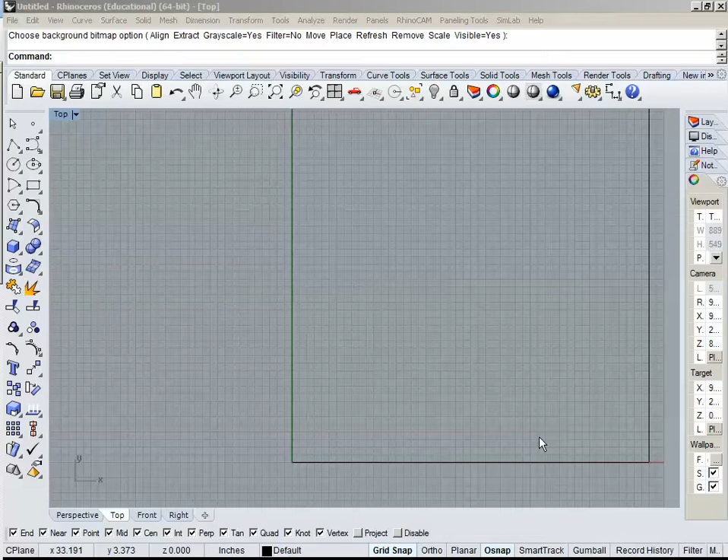Okay, so you're going to have some kind of, let's do a 6 by 6 square. And you guys are going to be offsetting this by 1 inch. So your stamps are going to be 4 by 4.

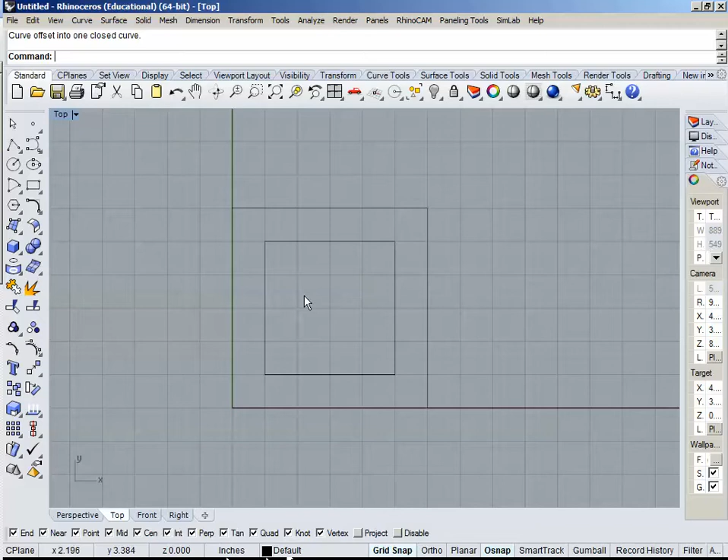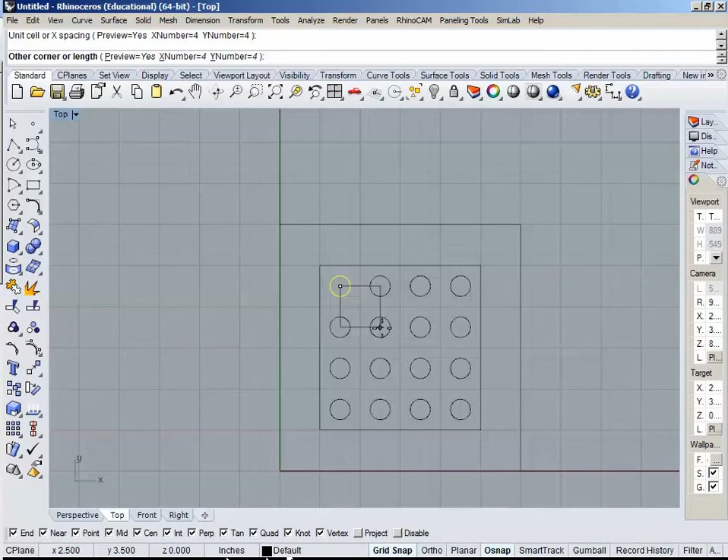So let's just say my pattern, I simply want it to be a bunch of circles. Whoa. And let's just do 4. Doing a 4 by 4 by 1. This is one of the nice features of Rhino 5, that it previews the array. It's awesome. Let's say that's my stamp. All right.

So setting up the toolpath for engraving, if you guys don't already have your RhinoCam browsers open, you should have this tool menu, the drop-down menu for RhinoCam. Machining Operations Browser is the one thing we need to open. And then the second thing is Machining Objects Browser.

And it may not open with all the tools in, because I've used this already. So all the tools that we have in the shop are populated in the knowledge base. If you've already loaded the knowledge base, all that information is already in the browser. So you guys all saw this when we were looking through the drawings.

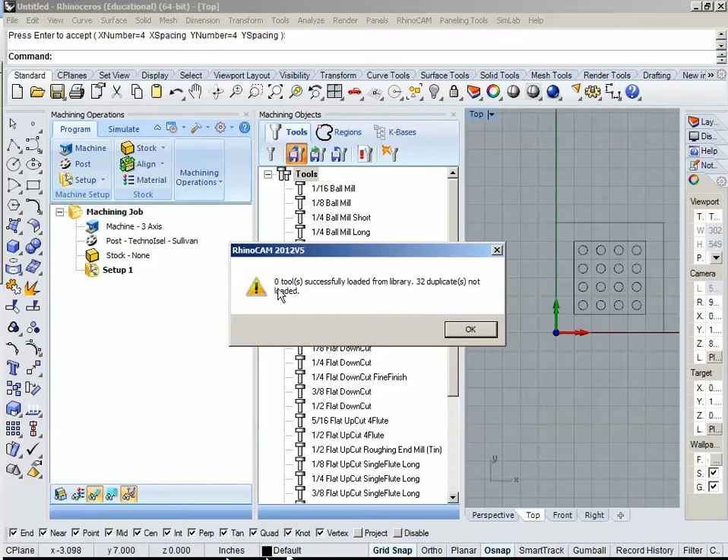What you want to do first is to go into the Tools tab, and it's going to look a little bit different. You click on Load Tool Library. And I got to figure out where mine is. And we need to get you the knowledge base too, so remind me to show you where that is. And you should have an All Tools database. Just open that up. We didn't bring any in because all 32 were already in my system. But it'll say all 32 were brought in.

Then you want to go to knowledge base. We're working in foam. So I'm hovering over these, and you can save the knowledge base or load the knowledge base. You want to load the knowledge base. And looking for foam, much like we did already before. And this looks identical to what we used in drawing, yeah?

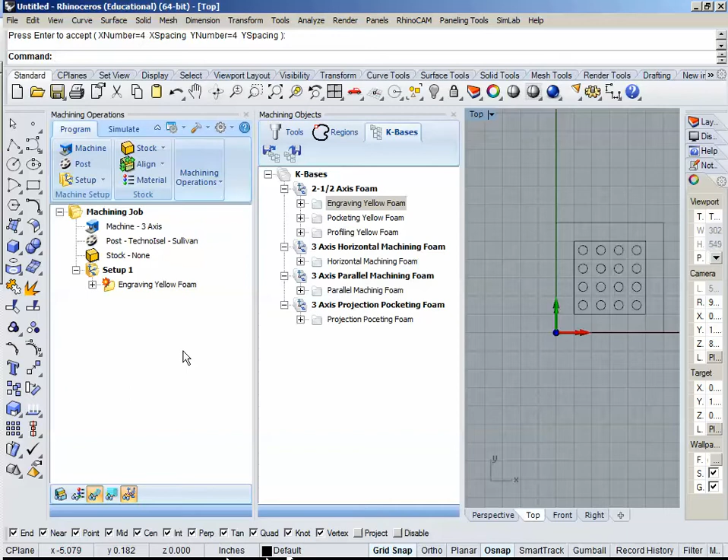And so we're engraving yellow foam. We have yellow foam, but the foam is pink now. So it's pink foam. It's just the foam that is used in construction. It's extruded polystyrene is what it is. So once we're here, we don't need the Machining Objects browser. We can close it out.

You can double-click this folder. If you double-click where the words are, it's going to give you the option of changing. Whoa, it didn't in that case. It usually gives you the option of changing that text. So just get in the habit of double-clicking on the icons. I could double-click on that folder, and it gives me all these tabs.

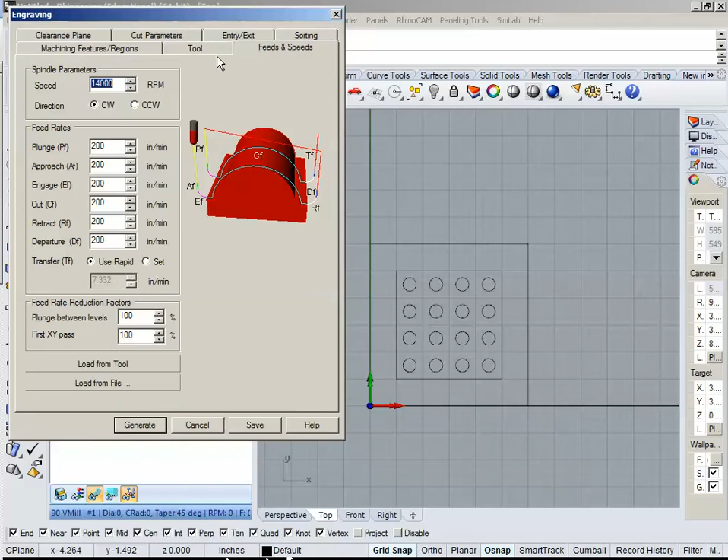I find that if I'm going across these tabs and I go up to this second level, it flips those levels. I find it hard to follow just the graphic layout there. This is the same information laid out in a vertical fashion. So we can work from top to bottom.

Logically, it makes sense to me that we start by defining what we're going to be milling and work all the way down to setting how deep we're going to cut into the surface. That just logically makes sense to me, but there's more than one way to go about that. You'll probably see that depending who you work with in the shops. So I'm going to do it this way. Just clicking the plus here, opening that folder.

First thing is machining features, and as I told most of you at the CNC, these are just the features that we want the CNC to look at, to be concerned with, that it's going to quote-unquote machine, whether it be drawing or cutting or milling. That's all it means. Double-click there.

And then we don't use this flat area drive region. I don't think we've ever used it very successfully in the shop, so we tend to never suggest it for anybody. So you'll only be selecting this top button, select drive/containment region.

And a containment region could be, as we'll see in 3-axis milling, just like a circle, and you say machine only do 3-axis milling in that circle. So it won't see anything beyond it. It's like blinkers on a horse. It also means the line that you want it to engrave on. So it's containing its view just to what you're selecting.

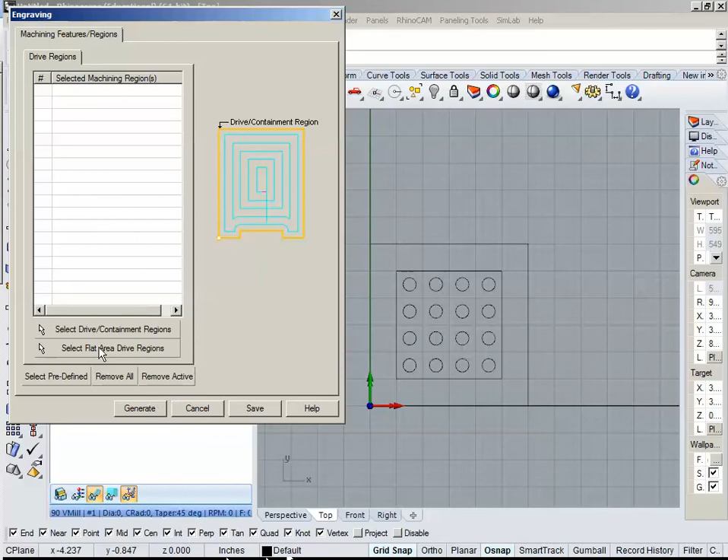No, it looks a little different there. Double clicking. No, it looks a little different. Okay, so I'm going to select the objects that I want to mill out, and I'm hitting enter, or I think you can also right click on the mouse.

And then what we did was we selected 16 regions, which is true. It's a 4 times 4, so it looks like that's good. And I want to save that information. And then now we do need to change the bit.

In the knowledge base, we have the standard settings already pre-populated. We're going to use a 1/8 inch ball mill today in pink foam. So I'm going to open this up, and I'm going to look for a 1/8 inch ball mill, and it'll be here somewhere. 1/8 inch ball mill right there, and I click save.

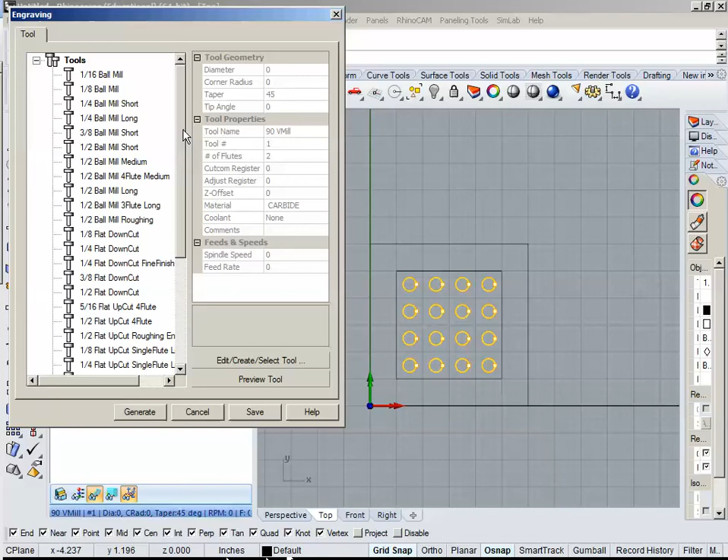So we've told it what to mill it with, and then we could change the feeds and speeds and the clearance geometry, but we're going to leave them the same. So the feeds and speeds is just going to cut as fast as it can. It does that for all. The foam is not going to be more dense, or nothing's going to impede the cutting in any strange way here. Oh, where's this going?

There we go. Okay, so if you do open this up, however, you'll see that this is pretty much maxed out, 200 inches per minute. I want to say that the machine goes up to 300 inches per minute, but it starts to shake around a little bit, especially if the geometries are really small and the whole thing starts to vibrate. So 200 is probably as fast as we ever want to run it.

You're never going to have to change these numbers yourselves. We're going to help you out with that if that is the case, that your particular project might demand that kind of look.

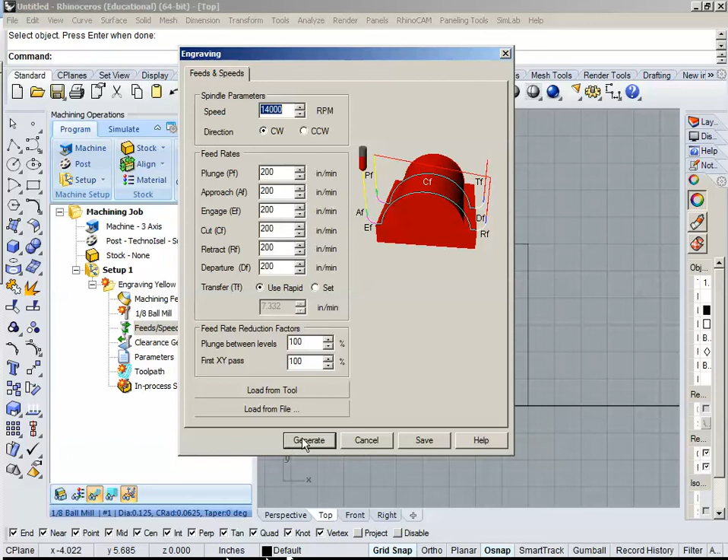Clearance geometry, this is just where we define how the tool transfers above your material. And this is just set at, if you define your stock, which we'll do in just a second, it's just going to go 1/2 inch above that stock. And since we're starting with a flat plane and we're cutting into it, it's just always 1/2 inch above. It's never going to hit anything.

This could be set to 0.1 inch. It's still not going to hit anything. But if you had a little bit of bow in your plastic, if you were milling into plastic, it could be bowing up 0.1 inch, and you could just drag across it a little bit. So it doesn't save you much time, so just be a little bit conservative. So we have it here at 0.5 inches.

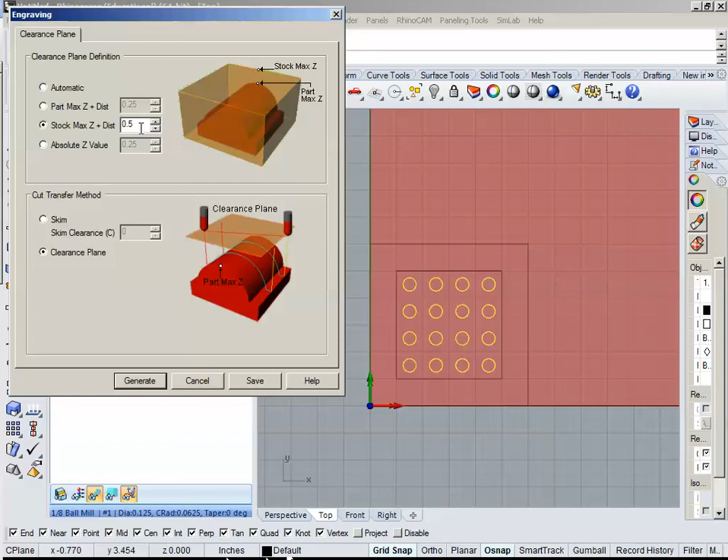Parameters, I'm not going to talk about anything here right now except for the depth of cut. And I think we might as well just keep this at 1/8 of an inch. I think that's fine. It's going to come up as 1/8 of an inch. Just double check it, and let's hit generate.

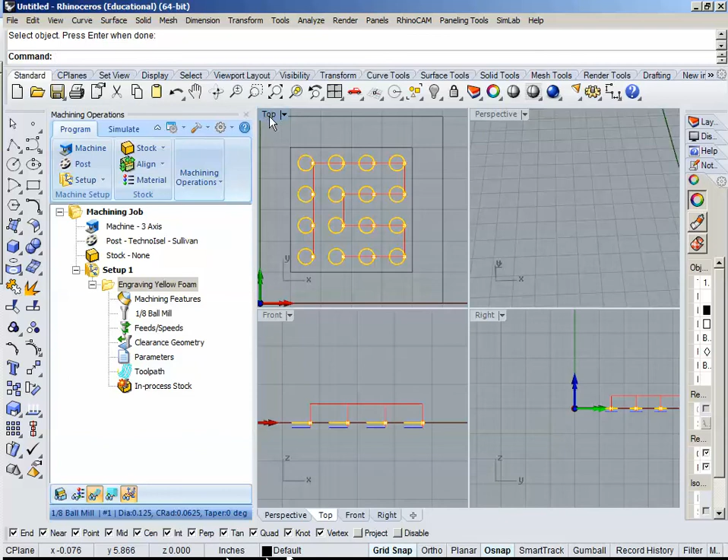And the toolpath is set up, so we might as well just take a quick look at it and confirm that everything looks right. So from the top, what we should see are these red transfer lines, and then what the colors are here is there's an orange and a yellow color superimposed. Yellow is your geometry and orange is the cut path.

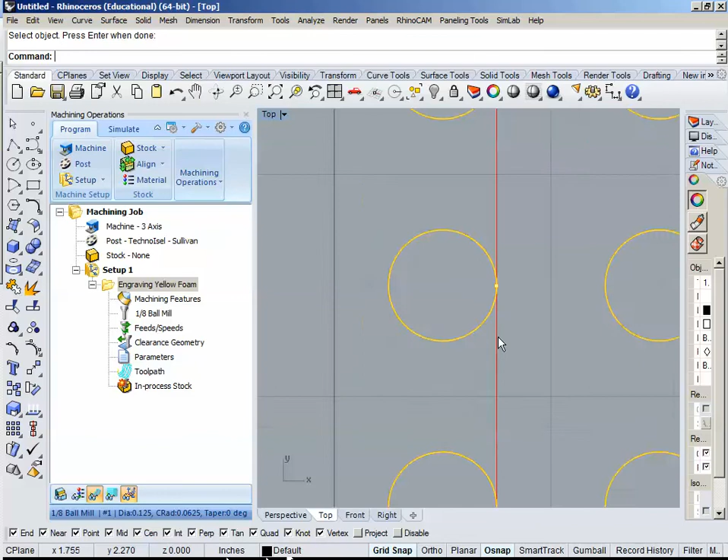So if you're actually trying to cut something out, you might actually have your cut geometry and the cut path slightly outside of it if you're cutting on the outside of that line, which we'll see in 2.5 axis cuts. So anyhow, there are 2 colors there. Take my word for it. It'll separate later on different types of cuts. The other thing to look at here is just making sure that all of your features are being cut.

And the other way to look at this is in the front or the right perspective. You just want to make sure that the cut depth matches what your expectations are. So in my viewport, each square is 1/4 inch, which means each 4 squares is 1 inch. And if I look here, it's 1/2 of 1/4 inch, which is 1/8 of an inch. Visually it confirms. All right?

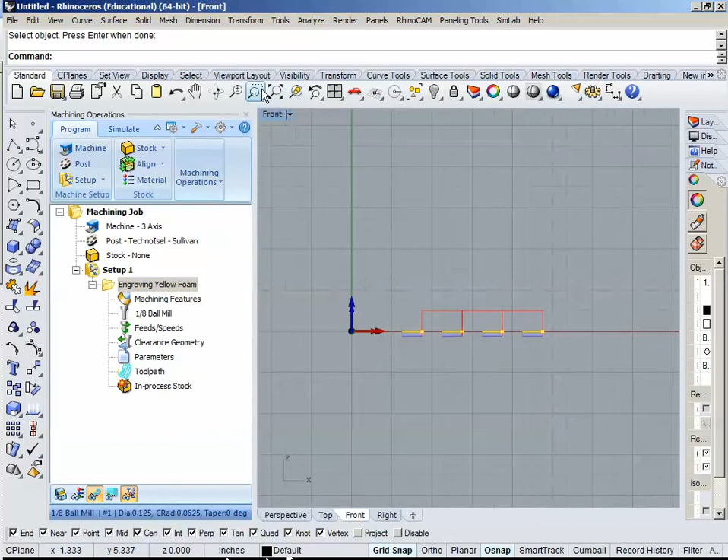And then I usually do one last check here and just kind of wiggle around a little bit to make sure everything looks normal and right. So nothing looks abnormal. And once you're here, you right click on the folder and you post this information, which I can't do in demo mode. I don't have RhinoCAM officially. All right?

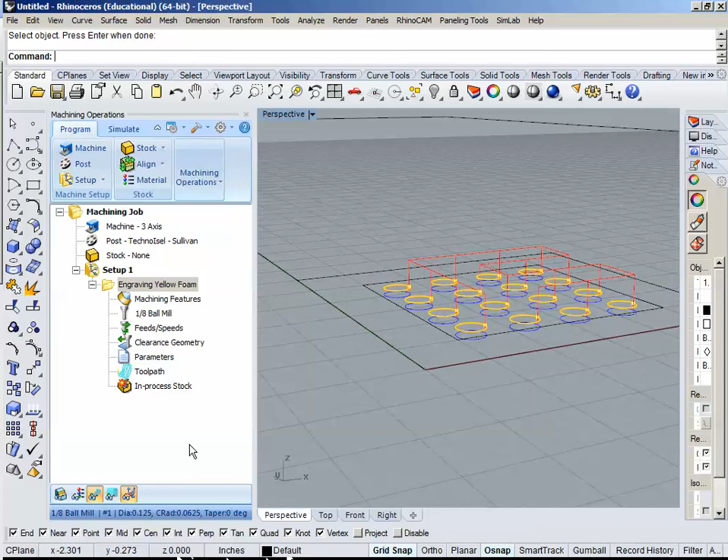Let's see if I can turn this off now. Which I can't.